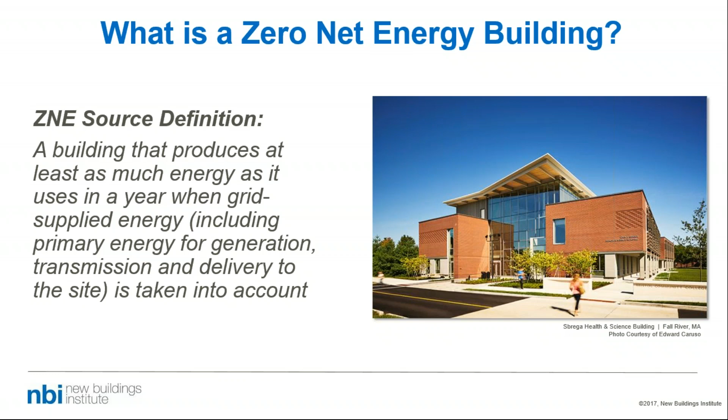So I'm going to do a very quick introduction to ZNE and ZNE in schools, and then pass the mic off to today's presenters. So a ZNE building is a building that produces at least as much energy as it uses in a year when the grid supplied energy, which includes primary energy for generation, transmission, and delivery to the site, is taken into account. And one thing to note is that there are many definitions of ZNE, but the key takeaway here is that all definitions are grounded in efficiency first and the remaining load serviced by renewables.

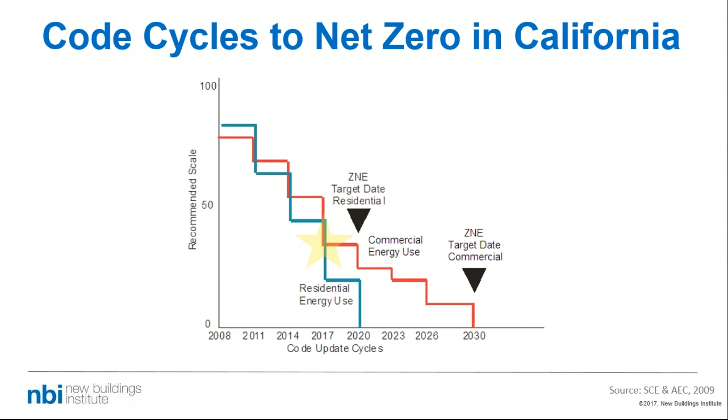Codes are the legal requirement to achieve ZNE, and on this map here is what the code cycle roadmap looks like in California. You can see residential ZNE by 2020 and commercial ZNE by 2030. So the key message here to understand is that this is happening, that Title 24 2019 discussions in the residential sector are complete, which means that the next step are non-residential codes, which will impact every school and commercial building in California.

But codes are not the reason schools should do this, and there are many benefits of these high-performance ZNE schools. So we're here today with our presenters to highlight the stories of these Prop 39 pilot schools, because ZNE is this next step in sustainable high-performance buildings. ZNE is a way to innovate now to save money for schools in the long run. They're an ideal building type with these generally predetermined occupancy patterns. You can generally pre-plan or understand and organize building occupancy.

They have sufficient land and are owner occupied. They're highly visible examples to the community and serve to set a precedent in the community. Going ZNE is fiscally responsible with taxpayer dollars. They put more money back into the schools because of lower building operation costs, and they have increased student performance with better occupant health.

ZNE buildings also provide project-based, hands-on learning opportunities for those 21st century skills. They're more resilient in severe weather events and can create safe havens for a community, which makes the community stronger and more independent. And ZNE is not just about the design, but really about operation, because schools are the ultimate early adopters for ZNE and set this example for future generations.

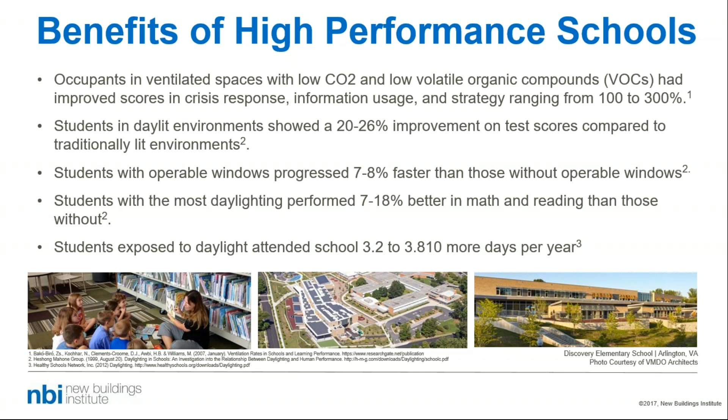These are just some of the examples of the research about high performance schools. With students spending approximately 1,000 hours per year in a school, we have to transform these classrooms into healthy and productive spaces. It's of the utmost importance, especially when the short-term and long-term health of students and staff is at risk.

And ZNE emerging buildings are buildings that have publicly stated a goal in ZNE, but have not yet demonstrated that they've achieved that goal. So each year we publish a list of getting to zero buildings. That's all the projects in our database, and we're always looking for more projects. So if you have a project that may not be in our list, please let us know and submit.

And we really want to emphasize this idea of the path to ZNE. So while ZNE is a realistic end game, the path to sustainable and high performance zero energy schools is a process that does take time to accomplish. And our presenters today will talk a little bit more about that. But school districts can start now with benchmarking, setting energy targets, writing policies, plans, and practices that'll put you on this path to zero.

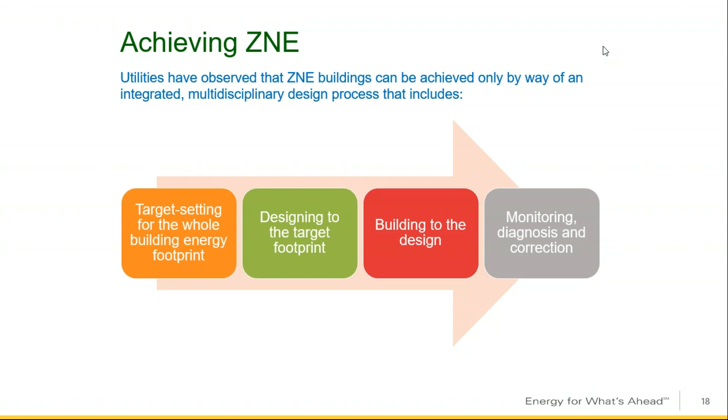So that's the quick snapshot of this effort, and I'll hand it over to the other speakers. Thank you. Thanks, Efren. That was great.

So now let me introduce you to the rest of our presenters today, who will dive into the stories of their pilot projects. Celia Hogue is a senior engineer at DNV GL. Seth Jacobson is a senior director at Climate Resolve, and they've both worked on the Garden Grove School District retrofit projects. Hussein Aga, who is the director of facilities planning and construction, and Farah Farzaneh, the sustainability and energy manager, both of San Bernardino Community College.

And so before I pass this off, I just wanted to highlight some of the quick resources available to school districts looking to pursue ZNE. I'll go through these very quickly, but the slides will be available after for reference. NBI has 2 additional offerings this year in California: an in-person workshop at the Pasadena Green Schools and Community Colleges Conference on October 30th, and the 4th webinar in our series, which will be focusing on the topic of costs of ZNE, which will take place on November 29th.

NBI also has case studies, guides, and toolkits, and all of these are available on our Getting to Zero resource hub, along with these additional resources. So now I pass it off to you, Celia and Seth.

Thank you, Riley. This is Celia Hogue. So today I'm going to talk to you about Santiago High School, which is participating in the Prop 39 ZNE pilot program. Seth Jacobson is also going to join me in presenting today, so we'll tag team it as we go back and forth with these slides, giving you both the design approach, which is where my firm was involved, and also the school side, where Seth is presenting the perspective from the school. Next slide, please.

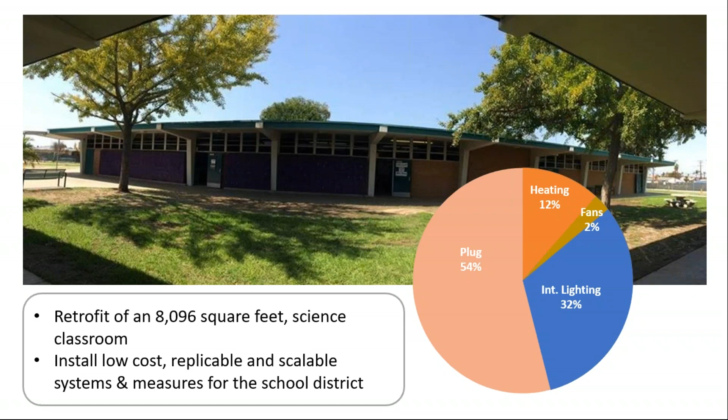So thermal comfort, in the participation through this program in finding retrofit solutions, was really something that they wanted to strive for, considering what their baseline was. So the next two high loads there were plug load and interior lighting, when you remove cooling from the baseline. And those loads are obviously driven by occupant behavior. So we really wanted to look towards educating the occupants, the kids in these classrooms as well as the teachers, in whatever solutions we looked at incorporating in this building. Next slide, please.

So in this case, we're really striving to get the kids involved in terms of having this healthy competition. And I'll build on what we ended up installing there in a later slide, but that also reduced the energy consumption annually by giving the occupants that knowledge and that power to be their own ZNE champions to further reduce the load. And then lastly, we looked at setback temperature optimization, again, to reduce energy, but also to improve the thermal comfort in those classrooms. Next slide, please.

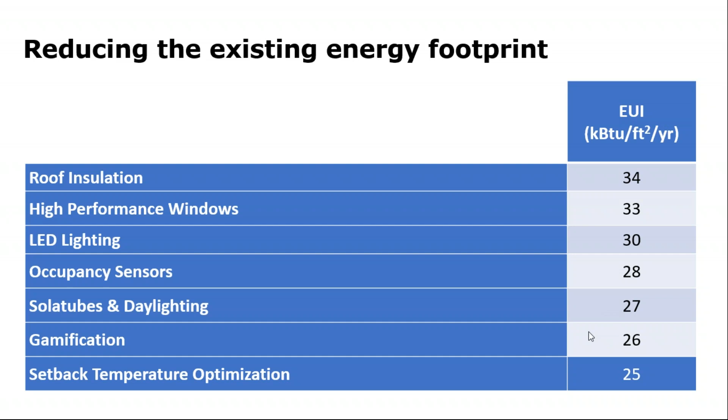And then the ZNE TDV definition, we were halfway through that analysis when the CPUC actually changed the definition for this program. And for existing buildings, the TDV definition just did not make sense. So they chose to adopt source in this case.

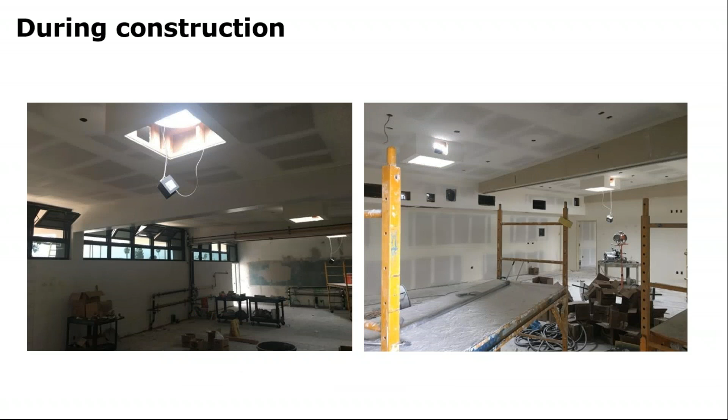Great. So this is what the classrooms look like before modernization and before ZNE. This is an AP Environmental Science classroom. Next slide, please. This is the modernization effort. Next slide, please. And this is what the classroom looks like now.

I just spoke with the teacher whose classroom this is yesterday, and she is overjoyed. She just loves her new classroom. She loves the AC. She loves the solar tubes and the increased daylighting. In fact, she said she rarely uses the LED lights in her classroom these days. She said that her kids seem to love it too. And she kept repeating how happy she is with the renovation. She's taking a little bit of time to add back some of the more homey and warm elements to her classroom this fall. But in general, she's just thrilled. Next slide, please.

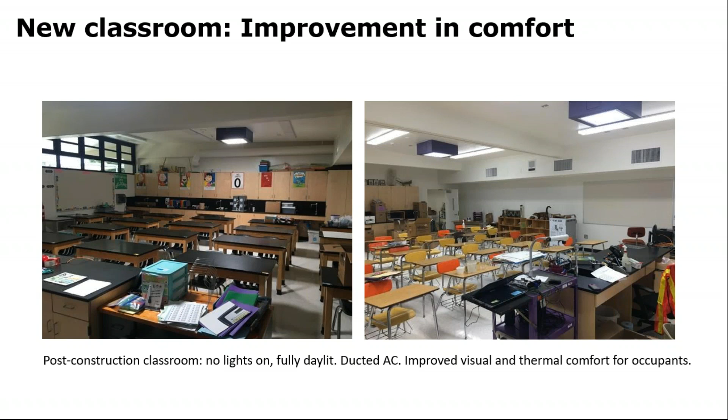So in terms of the challenges so far, Celia mentioned that the district had planned to use clean renewable energy bonds to finance PV, and actually a broader PV program across multiple campuses. As many of you may know, CREBs were eliminated at the end of last year with the new tax legislation that Congress passed. So that unfortunately took that source of funding off the table for the district, and consequently, they weren't able to justify reallocating other district funds away from other pressing needs within the district to fund PV.

And so currently the modernization is done and the building is ZNE ready, but is not ZNE because we have not installed the PV carports that were planned for the project. Next slide, please. And I'll hand it back to Celia.

Thanks, Seth. So, some closing thoughts for this project in the program. We believe that case studies provide invaluable examples of real-time challenges for ZNE projects. And we believe that with participating in this program, there really is not one program that fits all approaches for ZNE. And as Seth mentioned, we have had some challenges so far in terms of the school actually being able to fund the renewable side of this program since they eliminated the tax credits. So it's just an example of where this is not a solution that fits all ZNE projects.

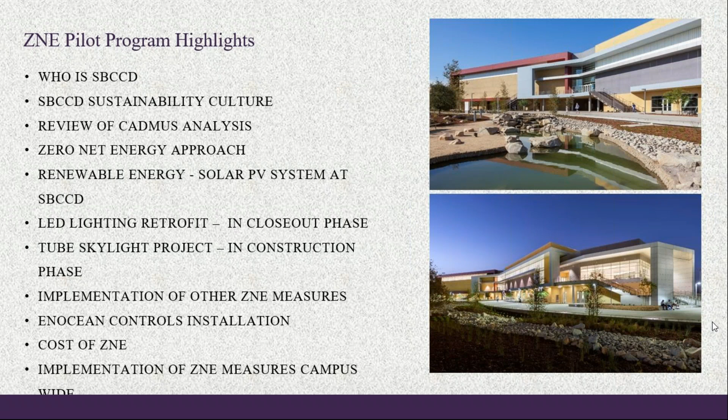And we will dive into the project implementation and how we were able to accomplish some of these energy efficiency projects, and obviously the main one was the renewable energy, which is the PV at our district. We will also be talking about our challenges and lessons learned from this effort so far. Next slide.

Who we are, who is San Bernardino Community College District. We are one out of 72 community college districts in the state of California. So it's a big system. We have two colleges, San Bernardino Valley College and Crafton Hills College. Our community college, like any other community college district, is a booster to the economy of the regional area. So we serve a big geographical region, almost 4 million people, for 22 cities. We serve 25,000 students on a yearly basis, and we have quite large facilities.

District-wide, we are over 1 million square feet, and overall facilities total 57. We, as a district, contribute to the economy, and that contribution was assessed at about $621 million each year. So community college is a really great booster to the economy within the region. Next slide. Okay.

In 2012, the district developed a great sustainability plan, and that plan identified 7 goals, and these goals are: create a campus-wide culture of sustainability, incorporate sustainability into the development of new and renovated facilities, invest in renewable energy and energy efficiency projects, develop a more sustainable transportation system, develop a more sustainable system for purchase of supplies and materials,

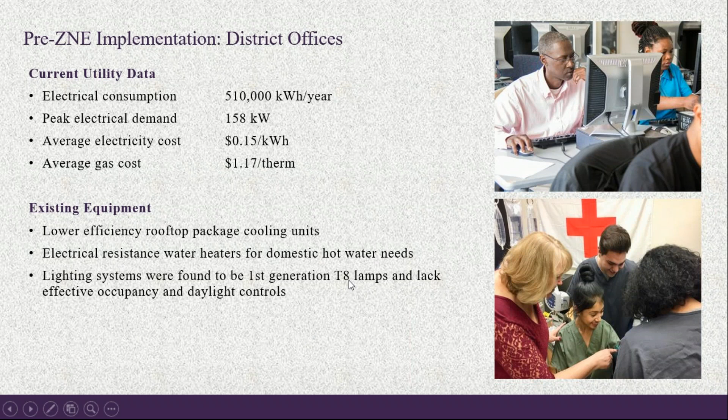And now we're going to dive into the district office zero net energy implementation. This slide provides some data about our pre-ZNE district office and the construction. We also did some energy analysis and audit, and we figured out we have really low efficiency rooftop units at the district office, so we need to do some upgrades there. We've also been using T8 lighting, and now there's an opportunity to implement LED lighting. So these were our audits of the facilities.

Cadmus came up with a really great analysis by auditing our facilities, with 10 energy efficiency measures and their impact and recommendations. And we were in a lot of meetings with the team in order to get these energy efficiency measures implemented, and I think we were able to get 8 out of 10 implemented because they all make sense. We secured the money through Prop 39 and also through an incentive provided by the pilot program.

Now I'm going to turn it over to Farah, who's going to walk you through the implementation of the ZNE program.

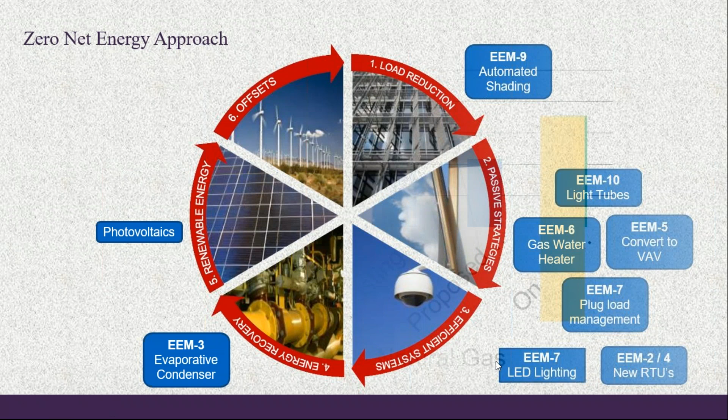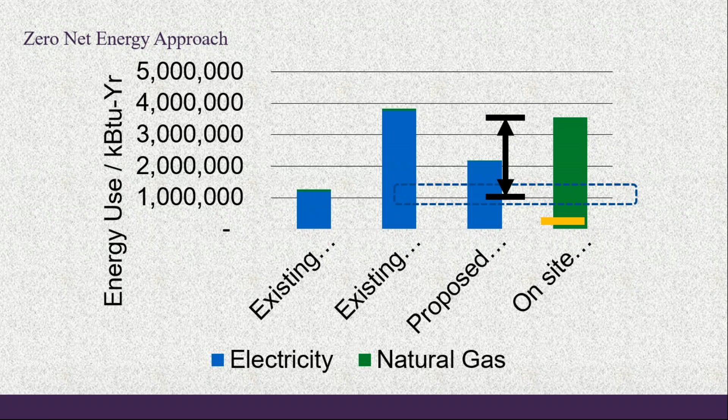And it was showing that there is a variance between the size of our renewable energy and the proposed energy efficiency measures. In other words, if we were to implement every single energy measure that Cadmus recommended, we will actually be net positive. But because of cost constraints, we are not implementing every single one. There were 10 measures recommended, we're implementing 8. And so we're targeting net zero energy.

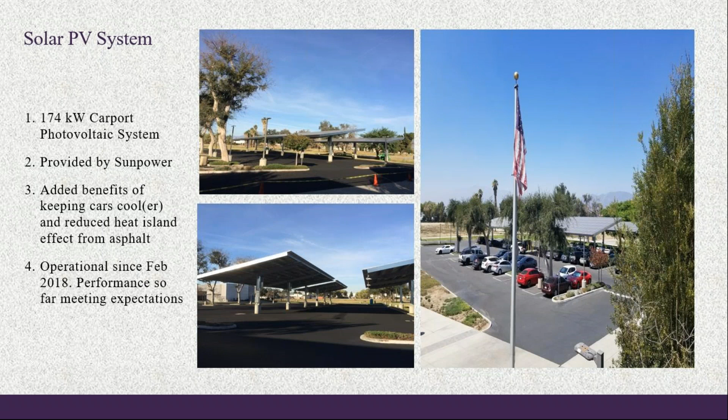Okay, this is better. This is our solar carport system. We have a 174 kilowatt carport system provided by SunPower. It has an added benefit, which we all love, and it's the reduction of the heat island effect. It has been operational since February, and the production so far has met expectations, so we are on target.

The first project that we implemented was our LED lighting retrofit project, because it offered the greatest potential to reduce our site EUI. Probably about 1/3 of our energy efficiency was by replacing existing fluorescent lights with LEDs. We installed 480 LED fixtures with enOcean occupancy sensors and daylighting sensors. We had a couple of really good partners on board, LA Lighting and enOcean controls, we worked very closely and coordinated with.

The lighting system was predominantly a retrofit solution. From the troffers that you see here, they take the inside out and screw in a retrofit LED module. So it's fairly quick and simple. All of these are integrated with our light tubes that you will see later. On the right, you see the color difference between the fluorescent and LED. The old existing lighting was quite yellow, and the new lighting is bright and clear.

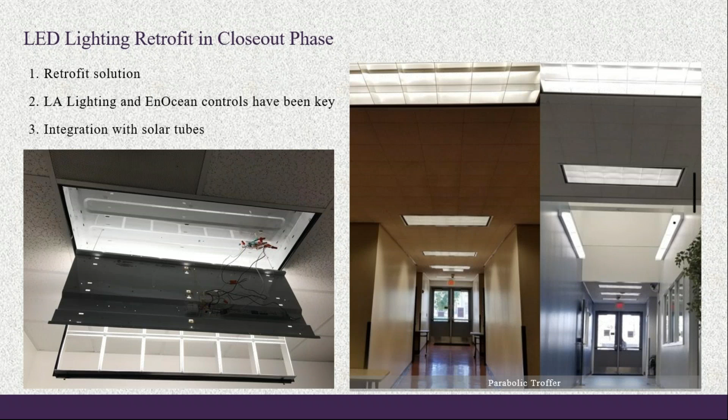The next one is another example at the executive training room. These are parabolic fixtures that we could not come up with a retrofit solution for, so the lights were replaced in the executive training center and a few other rooms that had the parabolic fixtures. Again, you see the color difference between before and after, fluorescent to LEDs.

As I said, enOcean controls were great to work with. The light tubes that were used on this project, which we will discuss later, Solatube, predominantly work with Lutron controls. Since we're using enOcean controls on our LED lighting retrofit project, it made great sense for us to use the same type of controls. Solatube initially was not comfortable with switching from Lutron to enOcean, but after several conversations, they accommodated us. They were great to work with, Solatube agreed, and an enOcean rep flew in to train our contractors on how to use enOcean controls.

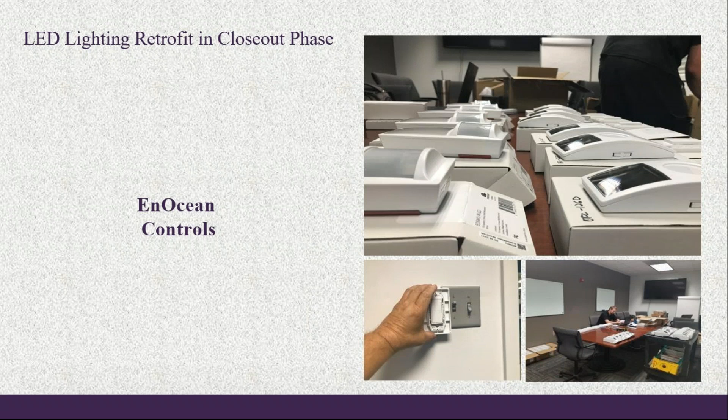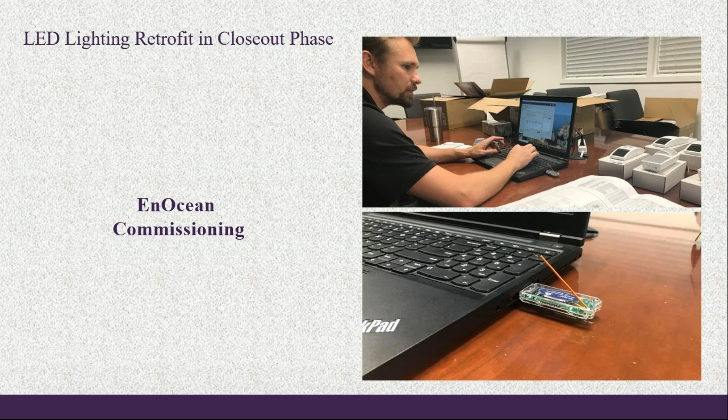Now, here's the startup process. As you can see, one of our team members working for our contractor is our controls specialist. He's working on the laptop. He's calibrating the lights, the controls, integration between various components, and setting light levels. This being a pilot program, it's natural that we're working on many firsts, such as Solatube working with enOcean controls. This is another first. The gentleman that you see here, with training and support from LA Lighting and enOcean controls, they trained him to become a controls specialist, and this is his first project as a controls specialist.

The installation of 15 light pipes began shortly after the LED retrofit project. HMC was brought on to design the layout for this project. I should have pointed out earlier that I'm using light tube and Solatube interchangeably. Solatube is the manufacturer of the light tubes, and their light tubes are being installed throughout this project. But it all comes out to energy saving, which is achieved by daylight harvesting.

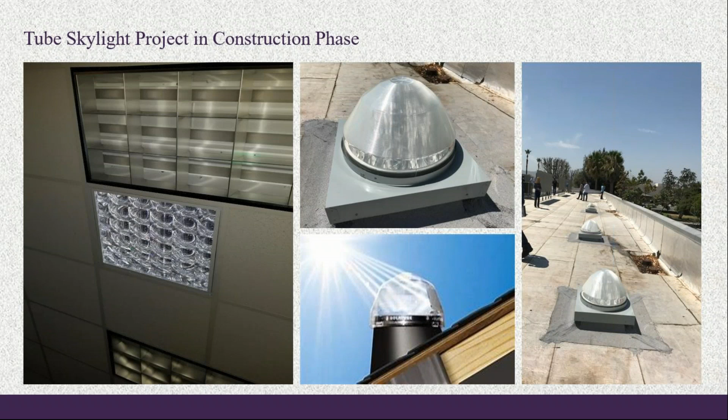It's taking the daylight sensors inside the room and automatically adjusting the artificial light to provide less light output to make up for more daylight coming in from the solar tube. When it comes to Solatube, they have a very nice lens. Starting at the point where the sun is coming in, they have the ability to harvest light even when it is at a low angle. It will actually reject high intensity when the sun is directly overhead.

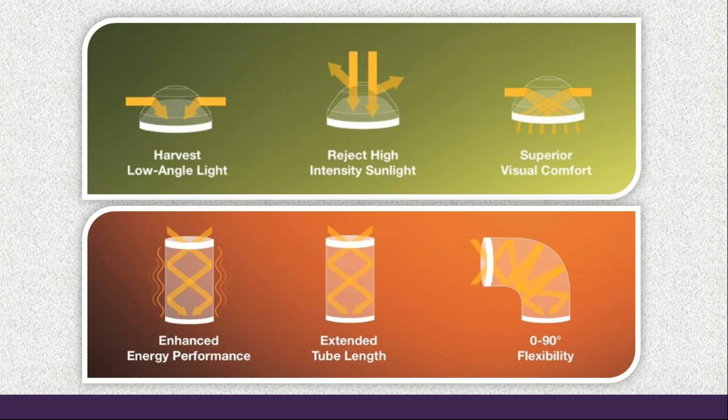Most of you are probably familiar with this product. It's a highly reflective tube that goes down from a lens through your attic space. It has a fair amount of flexibility. It bends at 90 degrees angle, and it also bends at the long run. But obviously, the shorter the run, the more direct the run, and the less loss of light. But in reality, it can be implemented for any retrofit solution. For this particular project, we also use dimming controls that Solatube offers.

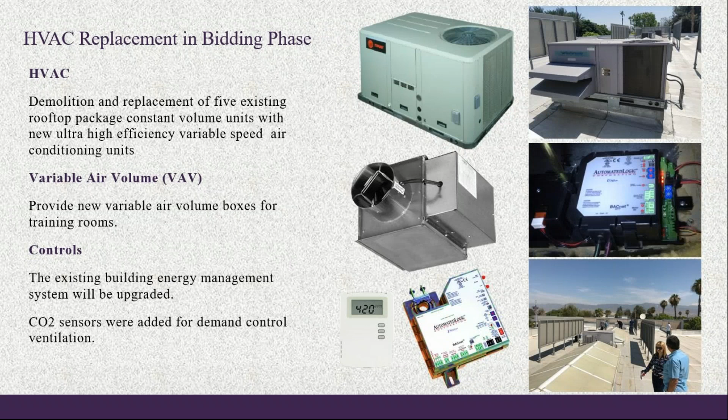Now, we have 2 more projects in the works. One is in the bidding phase, and the other 2 are in planning phase. We have the HVAC replacement project that involves installation of 5 ultra-high efficiency HVAC units in the district office, as well as adding CO2 sensors for demand control ventilation. We also have the hot water heater. We're utilizing the Southern California Gas Company midstream program. We're replacing existing gas storage water heater with new tankless high efficiency water heater.